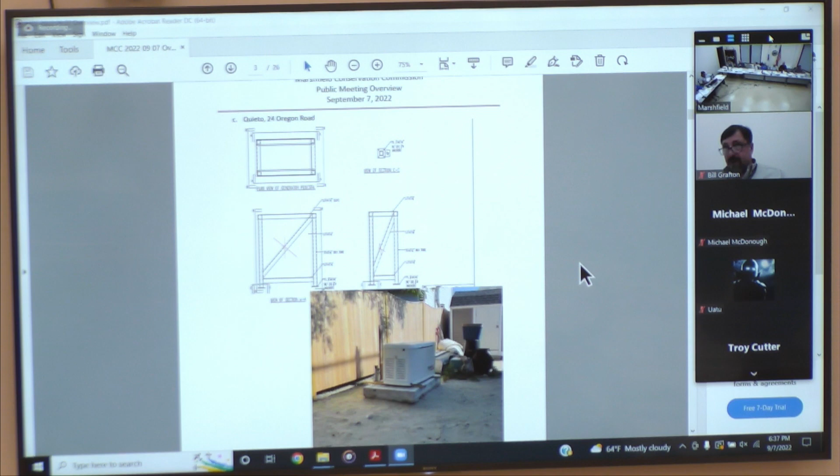As you can see from our visit the other day, the slab has already been delivered. That's the proposed stand design above that picture there. It consists of aluminum. It's not the approved generator, the pre-approved generator stand. But yes, it's made of aluminum and on slab on grade.

We have comments from the building commissioner stating that this generator is required to be elevated at least 4 feet above grade and will require footings or diamond piers. Slabs are not appropriate in an AO zone and will erode and scour during flood conditions, causing structural failure.

This structure still needs a certificate of occupancy, and the building department cannot deal with a generator until there is a certificate of occupancy.

That would come under obtaining all subsequent permits, so that leaves Andrew and the other departments in a position to condition the approval here. So that leaves us able to go ahead and do this as de minimis, and then you stated out in the open that this additional requirement is out there, and it's a natural concurrent moving permit of sorts. So we'll be approving the location, but not the design.

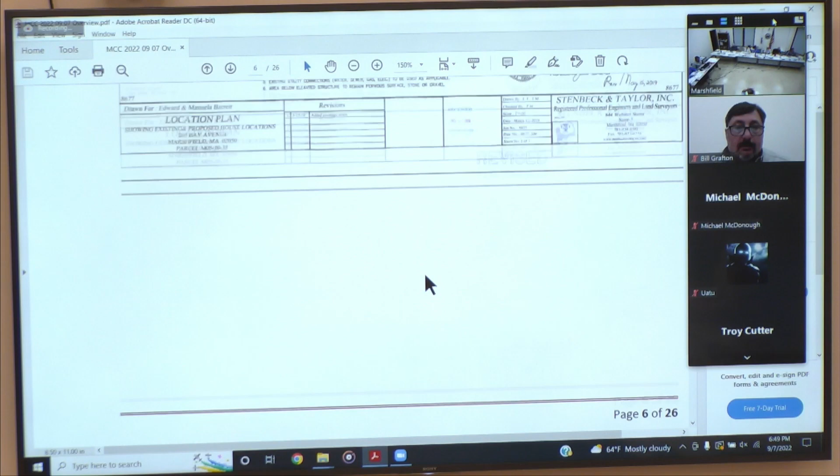We just got it. Is that working for you? Yeah, sure. So which is this? Existing home? Yeah, this is the previous approval. That's the existing home, and that's a sort of different site. That's the one, yeah.

So that's the original approval for this property, that was the existing home, and was proposing a new home on the lot. There was a new owner of the property, Meg Good, who is proposing a different house on the lot, which is why we're here tonight. The house is 6 feet narrower than the house that was originally approved.

It is the same depth, front to back, but narrower by 6 feet. It's also going to be on trimmed wood piles. The finished floor of the structure was required to be at 12 minimum. It's in an AE 11, so it needs to be a foot above the base flood elevation of the finished floor of 12. I suspect it's going to be higher than that, but the minimum requirement is 12.

The reason I say it might be a little higher is because the ground there is 11. So with finished floor at 12, you usually have 2 feet between the finished floor and the top of piles, just for access into the building for utilities and so forth. I suspect it's going to be maybe 3 feet higher than the 12, but the minimum requirement is 12 for that, and that's essentially why we're here. It's a similar house, just a little bit smaller by 274 square feet in the footprint.

Okay. Do you have any comments on that, Bill, or Mike?

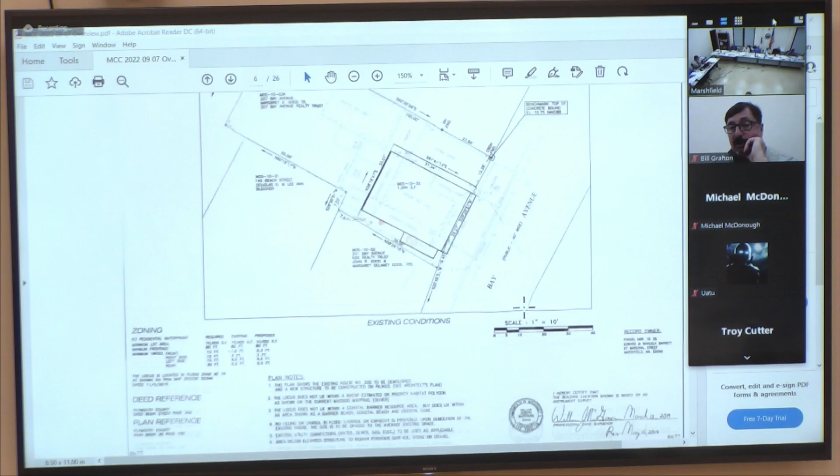Rick did a nice job on this. He took over for Terry, and that's what we need. We need reductions where possible. Barrier Beach, Coastal Dune. Agreed. And a floodplain, and he's in riverfront.

Okay, any commissioner comments? In that case, I move that we vote to approve the reduction of the building footprint square footage as a de minimis activity with special conditions to be captured under the SE 42-2803 as-built submittal for the request for certificate of compliance.

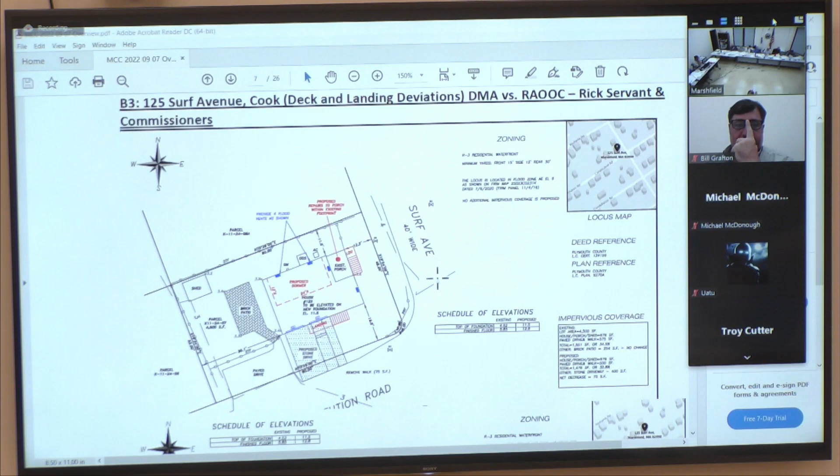This one looks familiar, right Rick? Okay, yes. Item B3, 125 Surf Avenue. We have some deviations with decks and landings. You're going to take this one also, Rick? Oh yeah, okay. We got both here, Rick, just so you know. So, this is 125 Surf Ave.

The existing approval, as the one on the top there shown, is what was approved here by the commission. The house is going to be elevated on a new foundation with those proposed 2 landings to get it down to the ground. The house is quite a bit off the ground.

What's happened is the homeowner changed the decks on the house. We went through zoning, got approved, and worked closely with the building department to get a deck that wraps around 2 sides of the house to connect the driveway with the back of the house. A lot of that was geared towards the elderly mother in the house. It was approved by the zoning board for this wraparound deck, but it never came back before the commission to show the revisions of what was approved. So that's why we're here tonight.

It kind of got missed. The deck went forward with the building permit, but the plan never came back to the commission to show the changes.

So essentially, what you have: we changed from a landing and a long set of stairs that were to service the building, to that 6-foot wraparound deck that wraps around the front of the house and then around the easterly side of the house and connects to that rear porch in the back, just like where it's highlighted there. So we have an increase in square footage with that deck area.

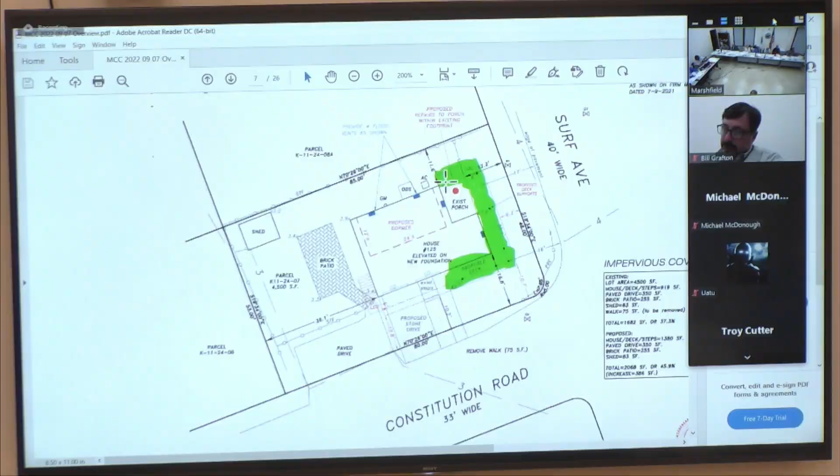My calculations, based on between the existing and the proposed, show we now have an increase of 386 square feet over what was existing and what was previously approved. When you take out the areas of those landings, which were large but certainly not as big as a 6-foot deck that wraps all the way around, in the end we have a 386 square foot increase.

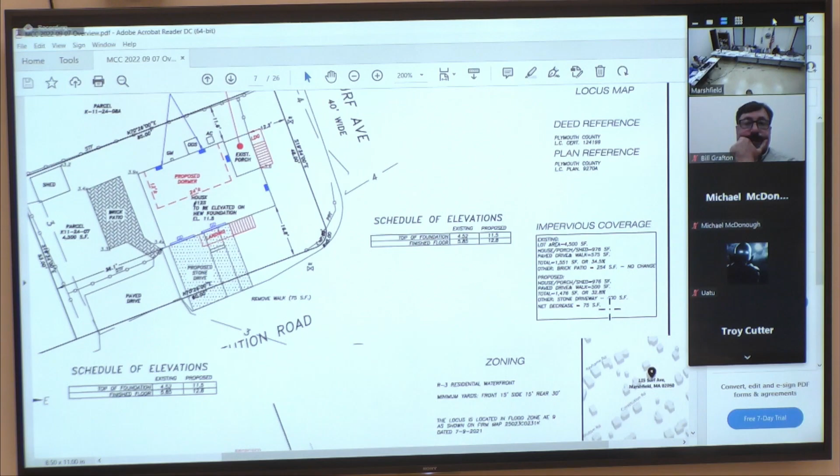It isn't an issue. I count 11 concrete piers out there to support this deck. The deck isn't completed, but it doesn't look to me like there's going to be any more. Right now there are 11 concrete piers in the ground and 1 wooden post connected to the foundation, so 12 supports in total.

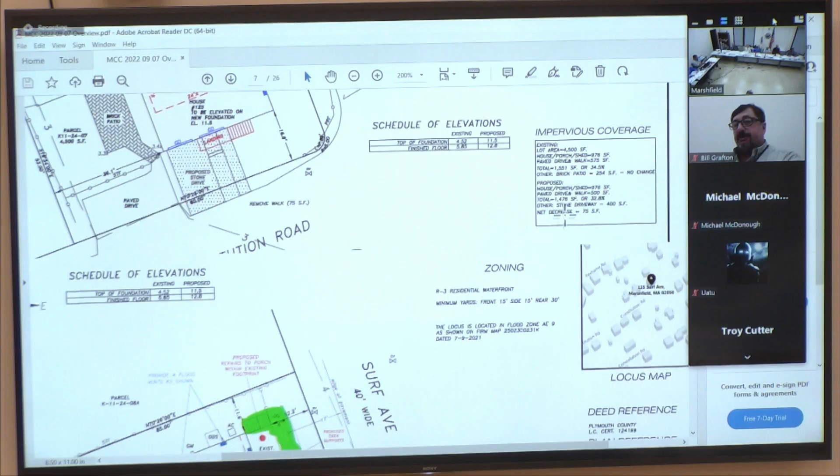That's essentially what happened with this. How does that impact the impervious coverage? How do the piles impact it? I calculated the whole deck surface in this table, so it's shown underneath the deck. I did the whole deck surface as the 386 square feet. It would be considerably less if we used just the footings, but I went with the entire surface of the deck. If you look here, it's a net decrease here of 75, and this 386, so it's really in the 400s.

He's using coverage, which is elevated up, not the post. If we just did the post, he'd only be adding maybe 11 or 12 square feet, about a foot square.

I think the key is, this project's been a runaway project, and we've got to stop that. Rick's here to help do that. I talked to Paul Young in the field. He understands we let him continue with our cease and desist, but if they start putting up hardscape, that's a problem.

Well, they have a patio already on the plan. There's been a long little history here.

So we have a choice between a de minimis or submittal of a request for amended orders of conditions. I think de minimis would send a message that they can't go and do any regular hardscape because it's a runaway project. Does anybody have any strong feelings as to de minimis versus amended?

Okay, how about a de minimis with the updated plan showing - I think it has an AC unit which I didn't see on this - and have those things thrown on the plan. That's on there, unless there's something new, Joe. But I thought I saw it in the one I had, I didn't see it on this one. It is there, in the back, behind, at the end of the green there. Oh, I see it now.

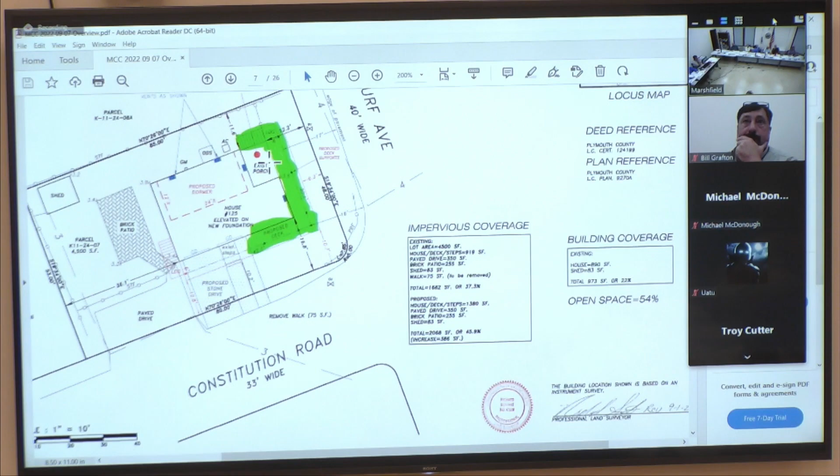In that case, I move that we vote to approve the addition of the elevated deck on concrete footings and new locations of the landings as a de minimis activity, with special conditions to be captured under the as-built for the request of certificate of compliance. May I have a second? Second. All in favor? Aye.

Now tell them to behave, because next time we might amend it. Put a note in the building permit next time, because this is like three strikes you're out. It's gonna happen for sure. Thank you for understanding that, very much. Thank you.

Okay, item B4, 74 Blue Heron Way. This is a de minimis versus a request for amended order of conditions.

I'll speak to that one. Mr. Brett Corchin was here last week for the addition of the pool house on his property, with the associated trenching. He called back after that meeting about removal of a portion of the existing driveway and also the proposed paver patio. He's removing 400 square feet of the driveway to install a 600 square foot patio, a net increase of impervious area of 200 square feet. He's also doing some work on his egress stair on his porch, which is also highlighted.

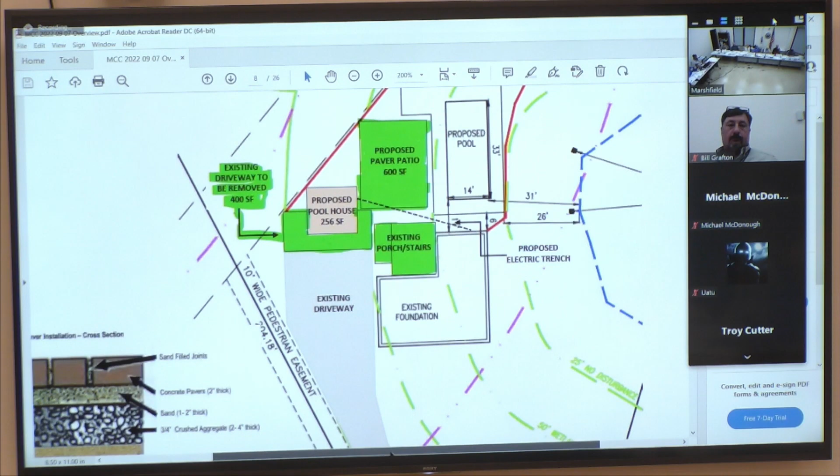There's a cross section here so you can see it's pervious. He understands that was pervious.

We have comments from the building commissioner on this. The project has not received any final gas, electrical, or building permit inspections, and has not had any inspections with the building department since August 6, 2020. No final or life safety inspections have been conducted on this residential swimming pool, so the applicant does need to contact the building department.

Madam Chair, if I remember right, when this came to us earlier we did ask whether or not there was the possibility of this patio, and we were told no. And we reminded him that it needed permitting.

Okay, good, he said three strikes you're out too. Bad day for this all. Good memory.

I spoke to him and so did Mike, and if it goes on again, he'll definitely need a request for amended order of conditions or a new NOI, because you can't keep doing that. But this is proposed, and he may never do it. He just wanted to get it out there as an option. That's why we called it out, or the guy did.

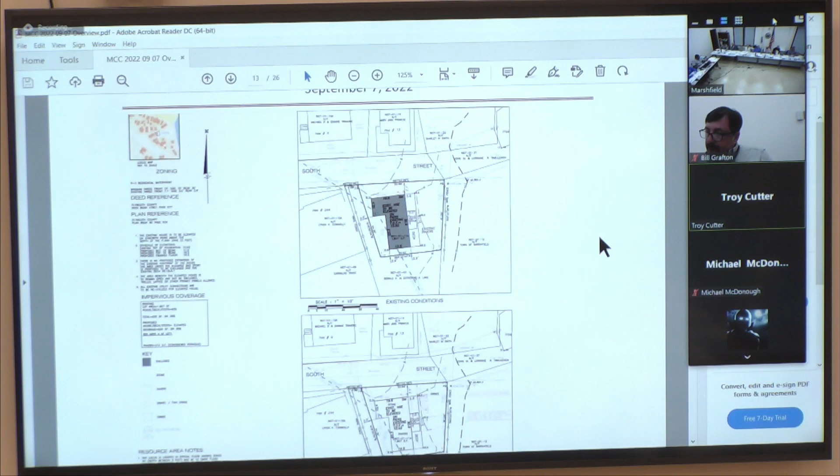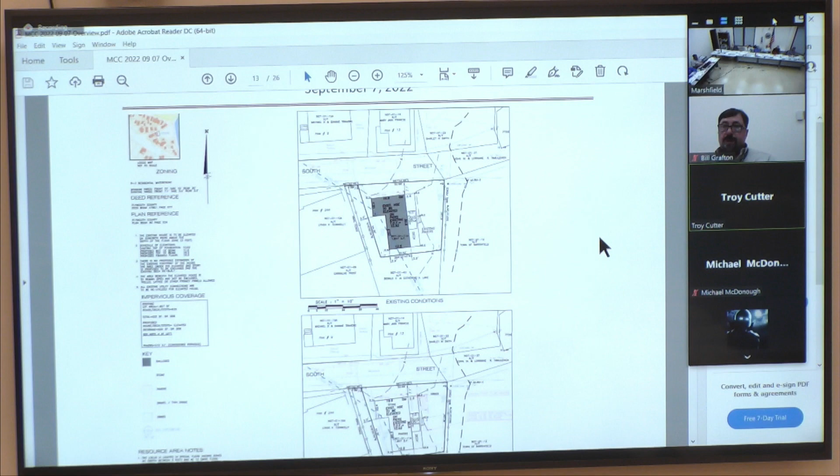Okay, so would you like to explain the situation here? Yeah, sure. Going back a little bit, I've been working with the building commission to rectify a few things after the house was elevated onto the concrete piers. The main thing being we had an enclosure around our utility pipes, our water pipes, that was put up. So the building commissioner recommended we reach out to a structural engineer to make an assessment of the property. We had that done by EPOP, and since then he had us add in two smart vents to the enclosure to be in compliance there. Then I think it was Bill, and I forget your colleague's name—Mike. Mike stopped by and we just talked over some other things. Okay, thank you. Of course.

So, we're in Barrier Beach Coastal Dune in a floodplain. This is the original conditions right here. They got approved back in, say, May of 2021, just to be clear. And these were the proposed conditions.

And so what I'll do is just, I think photos usually help a lot. This was the site visit for... let's see, one more, yeah, thank you, Mike.

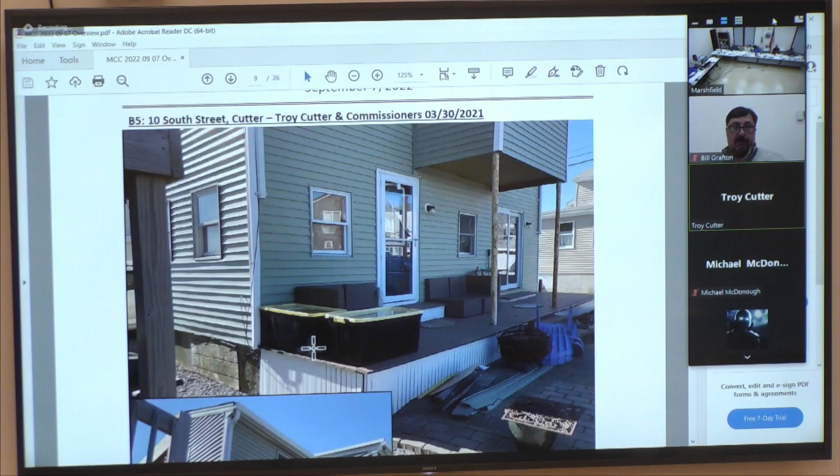These were the site conditions down by the World War II tower, everybody knows it, and this is what it looked like at the time. You got a paved patio here, a paver patio, and these are the conditions from this side of the house, okay? So then they elevated up.

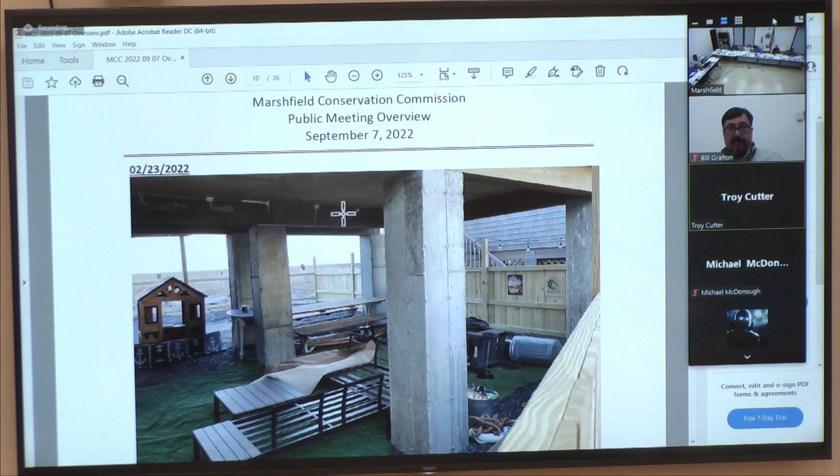There was a lot of discussion about open piles versus these concrete piles, and the concept was for an open environment underneath. This was February 23, 2022. You can't see it, but there's a post right here, and there's a deck coming over. You'll see that momentarily. And there it is.

So this was all pretty consistent with what was on the plan. There was a deck to be up here, I think a porch and so on, and then this raised area right up here. So it's pretty hard pan in here.

And then we got called in, I think it was the 28th of July, I got an email from Andrew Stewart saying that they had put in an enclosure, so we went down to pay him a visit, and you could see within 5-7 months or whatever it was, he got this deck here, which can be removed. He's got shelves in here.

It's a mixed bag of things. You got couches, things that can be moved. We have a shower with, it's pervious here. You got some walls. It's pretty much open slits right here, which allows some water to pass through.

And then the enclosure, these are the vents that the engineer had recommended. And it looks like this from the side. So it's open like this. They tried to have a privacy screening and so on. And he's used shells underneath.

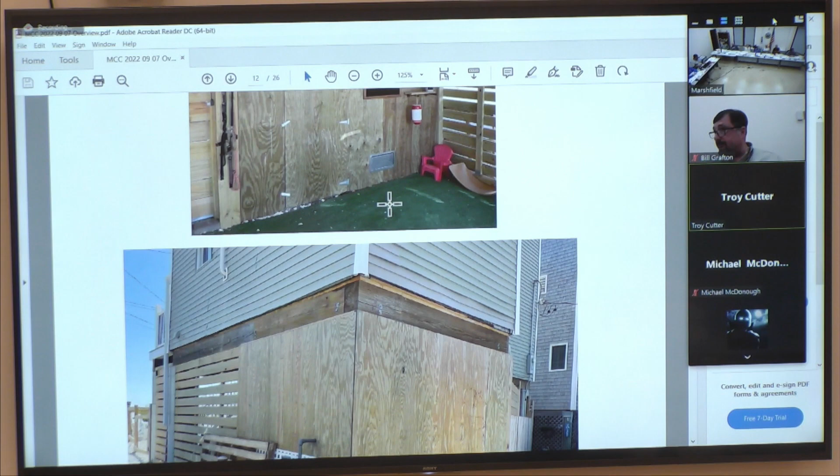He basically showed Mike and I underneath all this, kicked it back about 2 or 3 inches, and it was shells, but it's got a carpet on, etc. So there's a lot going on. This enclosure is probably the number one issue.

The commission doesn't typically say what's going to happen with siding, but you'd prefer this every day of the week. You can't really do that in this environment. The concept was for it to be a functioning enclosure, and the flood vents were required. I don't know where Andrew is on this one.

Let's see. Well, he says, as this location has been delineated as a coastal dune in the order of conditions, building code requires that the area below the structure remain open and free from obstructions. No horizontal slats or enclosures of any kind are permitted below any structures in a delineated coastal dune. Right, and you did find it to be a dune because it's barrier beach coastal dune, and then Rebecca Haney came with Andrew Point and the adjacent partner to go over that more in September of that 2021.

Okay, so basically what he's saying is you can't have that as per 780 CMR. That's where it comes in with the siding, and I can't argue with that. We don't actually have siding. I haven't had anybody, Andrew Point is not able to provide me with anything where conservation gets involved with the siding, but it's a dune.

Andrew is saying that 780 CMR calls it out. You can't have the siding, so I guess that's where you are. He does have the vents now, so I don't know.

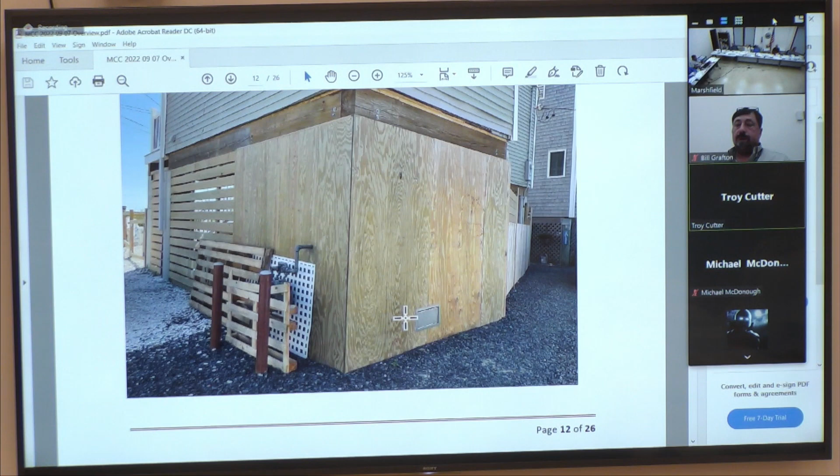So my conversations with the building commissioner and the inspector about the enclosure were, when they first went there, to address it so it could remain, to insulate my pipes. That's why we went through the structural engineer on that piece for the flood vent. So that was upon his recommendation to do that piece.

So the building commissioner is saying that you cannot have any enclosures below the structures, but you put in a flood vent. Did the building commissioner, was he in on that? Yes ma'am, he's the one that suggested and brought up the flood vent, and then I just needed to get it validated by a structural engineer, so VPOP provided a report for that. Is that saying how many inches they needed to be above grade, correct?

Mr. Cutter, was that the April 2022 letter? Is that correct? Yes, I believe so. Okay, I can pull it up if need be. Yeah, we have it, I just don't have it readily available for the commission. So it's the April 7th, 2022 letter. They address a variety of things like hinges and vents and how much square footage, how many there should be, et cetera.

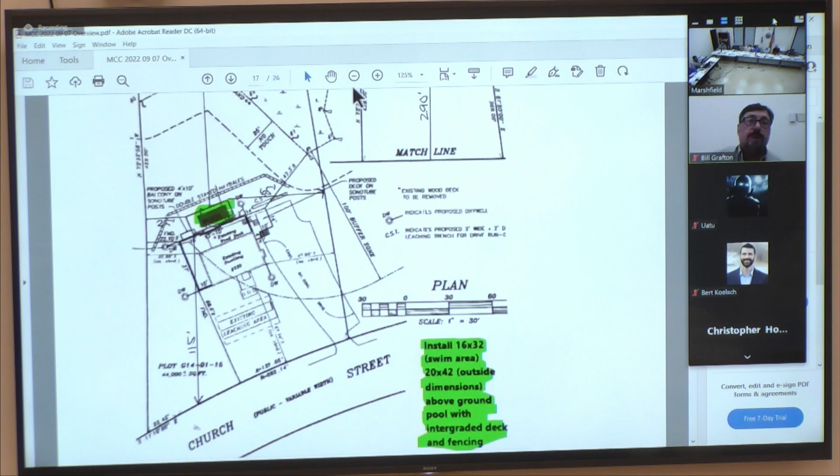Okay, you see the plan there. Would either Bill or Mike take this one? I'll take this one. So I met Mr. Purpura and then Mrs. Purpura and talked about the pool - they're interested in having a pool in the backyard.

And we tried to find out if there's any kind of background, and there is an old permit from 2008 or so. Anyways, long story short, this particular project is separate from that.

It's a pool, it appears to be outside the 50 based upon this plan. We're showing 65 here estimated. It's not surveyed in, and 25 here, so probably could be outside the 50.

This would be classic for an RDA. This is an accessory to the primary house in the buffer zone only, and so it would fit. We know about this wetland line here because of SC

42-2540 for an addition somewhere over in this area, I believe it extended in here. The conditions said they need to have 3 conservation markers here and no activity back in here.

They do have activity. Chair Haniff and I will be talking to Mr. and Mrs. Purpura separately about that. And the pool's above ground, and they have a cantilever deck that they're trying to put around the pool, and they actually want it to be able to step right on their existing deck right here.

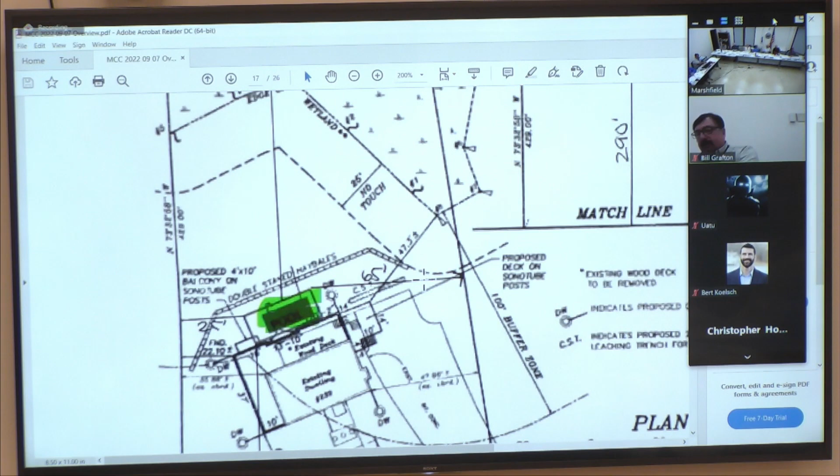So it seems pretty straightforward as a candidate for an RDA. The other activities can be handled under a separate process.

Any commissioner comment? Was there some building commissioner comments? There are building commissioner comments. I don't know if you have been into the building commissioner lately.

The pool and surrounding deck must maintain a minimum 10-foot setback from other structures. He is saying that the building permit was issued in error. I don't know if you have been contacted. That was because, if I'm not mistaken, it was actually approved, but I think it skipped past conservation,

and then I called in, right, Bill? Yeah, I know you voluntarily came to us because the building department didn't direct you to us, and I understand that.

So they came to me as soon as this came up. They actually voluntarily mentioned to the building department that they need a conservation review because they're within jurisdictional boundaries. Otherwise, they could have slipped right past it, and they did the right thing.

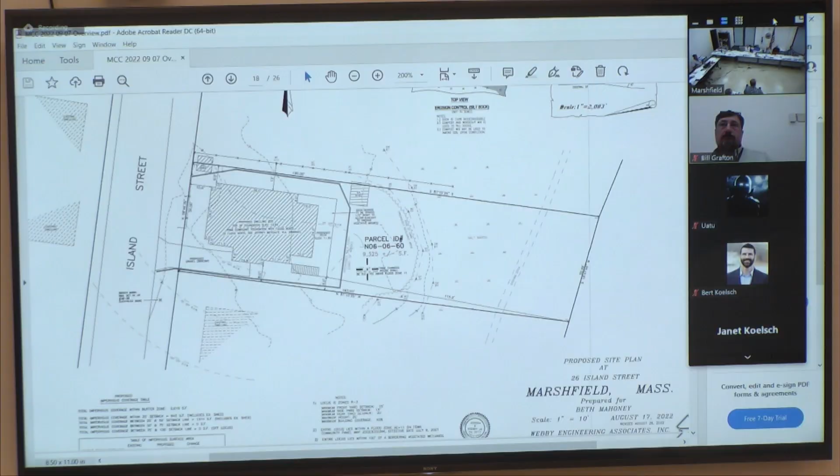What we're looking to do is reconstruct the single-family home and bring it into FEMA compliance, elevating the house above the flood zone and putting in a new FEMA compliant foundation with flood vents. Metcalf can describe those for you if you have questions.

We are partially working within the 25-foot buffer zone. We are already within the 25-foot buffer zone with the house and the deck, so what we've developed is a mitigation plan.

You'll see the existing house is shown in brown, the proposed house, and there's a proposed deck off the rear of the proposed house, shaded in red. So you can see that we're inside the 25-foot buffer, but we're accommodating the area to be rebuilt in generally the same footprint as the existing house, proposed larger with the deck.

We are proposing a 2-to-1 ratio of mitigation so that the total amount of new area within the 25-foot buffer zone is 237 square feet. Some of that is deck, and it's going to be elevated on posts, but we'll still include that in the 237 square feet.

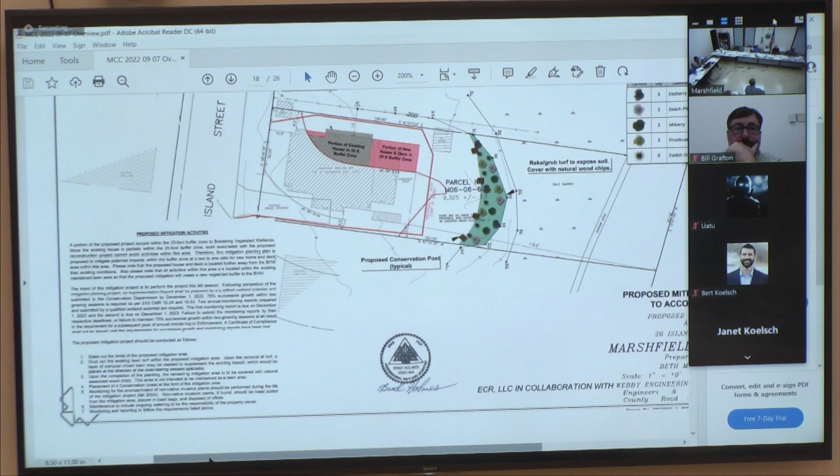I was able to get those conditions including the monitoring and the step-by-step process for implementation of the mitigation work.

So, in general, it's a rebuild, reconstruction within the same footprint, larger. We're in the 25-foot buffer zone, so we know that's a concern, so we're mitigating it 2 to 1, and we're bringing a house that's non-FEMA compliant into FEMA compliance. So, happy to take any questions you have.

Who's commenting, Bill or Mike? Mike can get this. Yeah, I can comment on this one. Okay, yeah, it seems pretty straightforward.

The house is going to be slightly larger. Notably, there was a fence on the back, and the Phragmites were right up to the fence, so having a planting plan here and added mitigation instead of lawn would be beneficial to the site.

It's part of your mitigation plan going closer, you know what I mean? So it wasn't, no, 110%. Yeah, no, it looks like textbook what we want. It wasn't, Brad knew what was going on, obviously. And you also get all of your standard conditions, so when the project ends, first planting season, this goes.

Only question I had in that mitigation area, there's an existing fence. Is that going to be removed? It kind of keeps the Phragmites at bay a little bit. We could remove it if the commission wanted to, or leave it in place. I wasn't proposing to remove it.

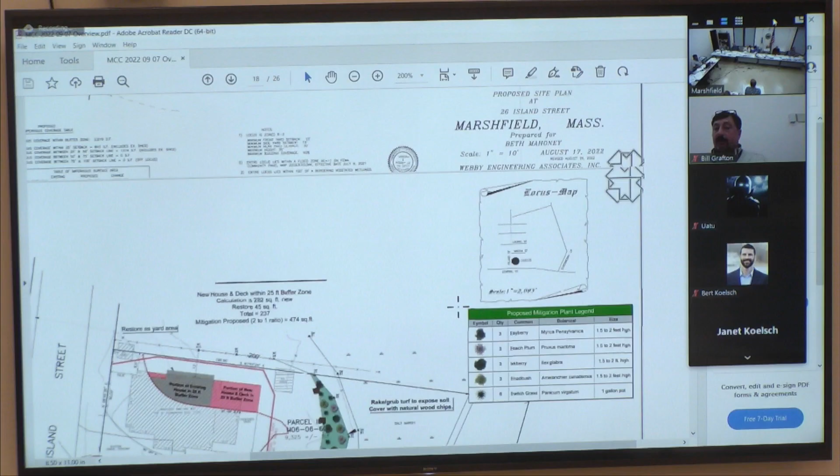So you could get them here, but what normally happens, Bert, on an order of conditions, is general information item 8 will cover the stamp plan, and the secondary item will be the mitigation, which will show these markers. So your markers are in there based upon general information item 8, your secondary plan, so you're covered.

Okay, and in this location, the foundation is satisfactory, correct? It's not barrier beach coastal dunes, so they can do this, I believe.

What did the building inspector, the commissioner, say here? We did actually sit down with Andrew Stewart at the time, at the beginning, and started the floodplain permit. We wanted to get that started, so we actually have that underway. That's another good thing then. I have no further questions.

I'll open it up to the other commissioners. No? I see nothing. I'd like to open it up to the public. Any comments? You're in the room or on Zoom? I hear nothing. I'd like to close the hearing.

And any special conditions, how many months on the growing? It's gonna be 2 years annual monitoring, and 75% successful growing, you'd see within 2 growing seasons.

I'd also recommend that the conservation markers are posted, the 4 of them, 30 to 40 inches out of the ground, facing obviously the house. Obviously follow all building codes and FEMA FIRM regulations.

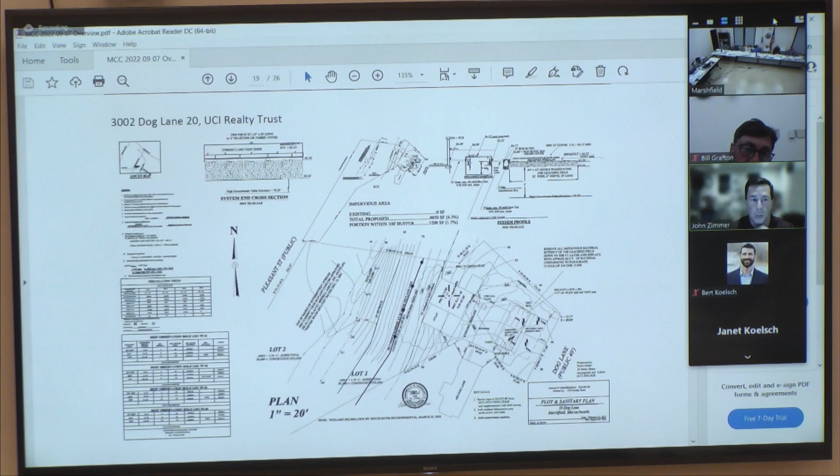A portion of the work is located within the 100-foot buffer to the BVW. There's no work proposed within the 50-foot buffer, and the structure is located outside of the 75-foot no-disturb buffer. Of the project, there's about 3,500 square feet total proposed within the buffer zone.

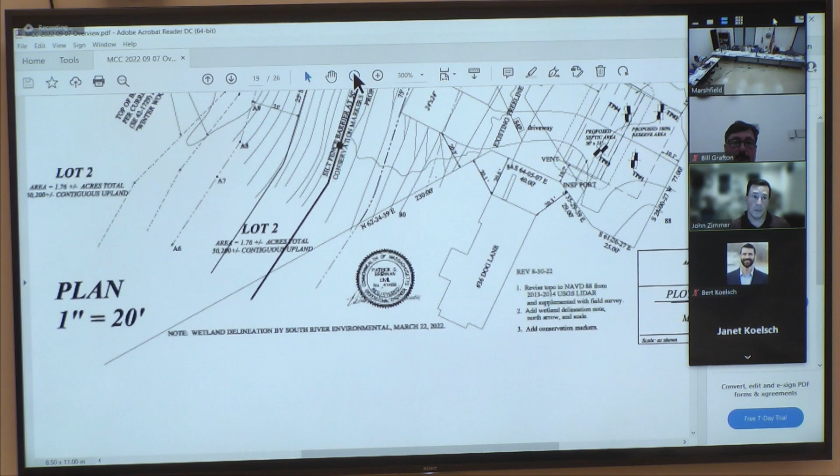With respect to impervious area, there's a total of about 6.3% within the property, and new impervious of only about 1.7% total, so a little under 1,300 square feet.

We worked with the applicant to install conservation markers along the limit of 50 across the property, but in actuality, a much larger percentage of the property is going to be preserved in its natural state based on the configuration of the lot.

There's really not much other buildable area within the property. So what's going to be located within the 75 to 100 is the portion of the garage and the residence. The driveway and the septic system are all located outside of areas subject to the Commission's jurisdiction.

We will install erosion controls at the limits of work and stabilize all exposed areas as soon as the final grading is done. That's about it in a nutshell. Happy to answer any questions the Commission may have. Right now, the property is undeveloped.

John, the correct date is March 22, 2022, down in here. Thank you, sir, by Pat Brennan's stamp. Thank you, John. Bill, your comments?

So the first plan that came in, there were severe changes or discrepancies between a number of the contours that were here and what we saw on the town's professionally prepared contours. So I asked Dana Jr. to look at that.

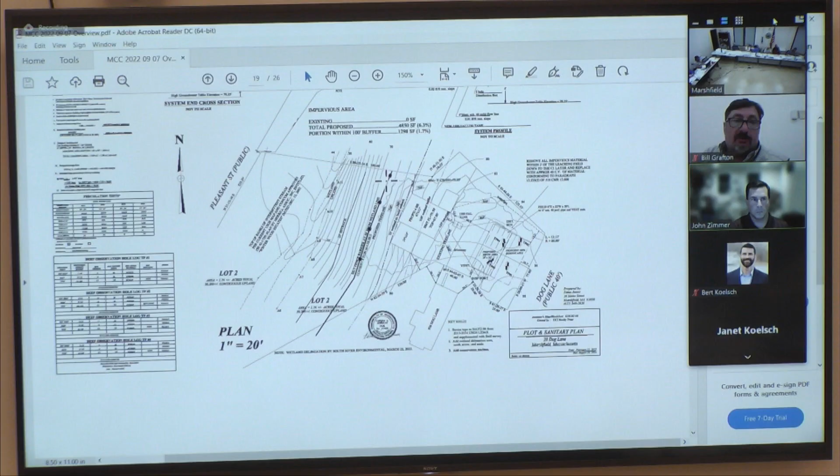So when you say bank, though, what do you mean? So the 50 there—okay, if you follow the contours, let's see if I can find the number. It appears to be the 70 right here. It kind of runs right through here. It's the last sharp line.

It might be, it's knowing where that is, because this is the fragility zone right here that will have the impact on all of this down here. Within like 5 feet of this is the area that is the most vulnerable right here. So having this known really well, it might actually be more like here, which is problematic.

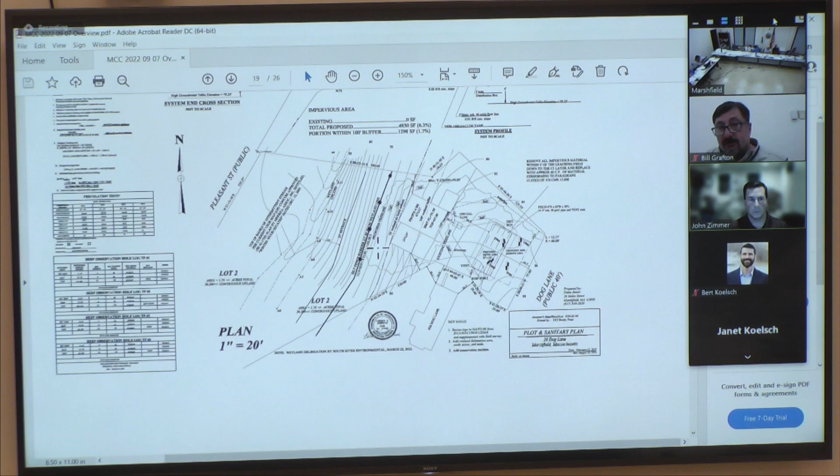If it's where it is, with conditioning, you might be okay, if there's no retaining walls that ever go in there. If these numbers are wrong and massive filling suddenly comes out of nowhere, they might need a retaining wall like the neighbor has over here, which is a small one, but this might be larger. And so that's the worry, is they step in, they get approved, and then, oh my, I have to bring in 80 tons or something.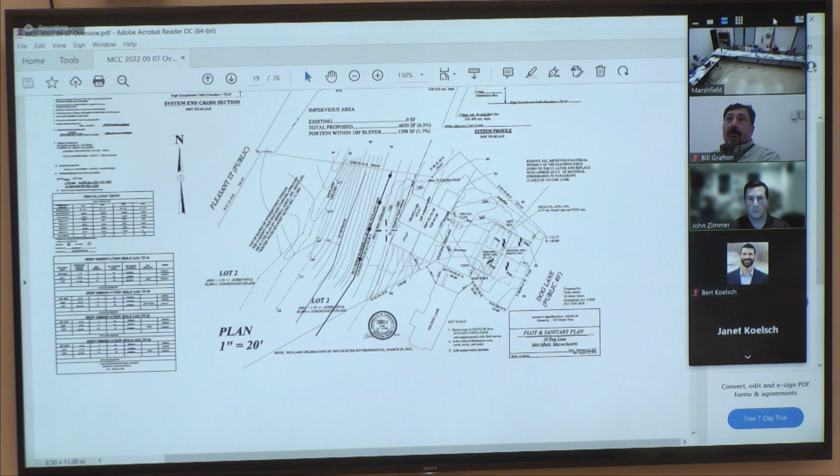And they need a request for amended order of conditions, or they want a de minimis, for a lot of dirt that's going to be filled in. So they want to prevent that.

Nothing further from other commissioners. At this point, I'd like to open it up. Is there anybody that'd like to? I see Mr. Finn.

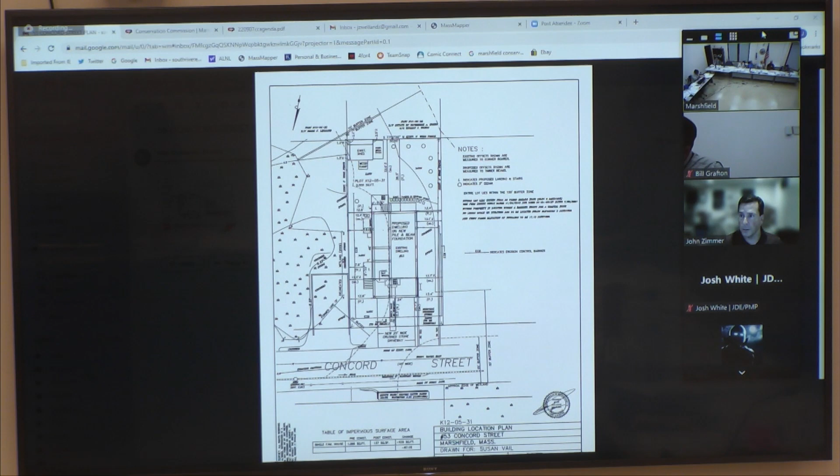So it's going to be decreasing the amount of impervious surface within the lot by about 87%, an overall net benefit to protection of the resource areas. But like we said, it is in close proximity to salt marsh and also within the coastal storm flowage. So that's pretty much it in a nutshell, I'm happy to answer any questions you may have.

There is an existing fence around the back with a shed that is shown on the plan. There's no plans to modify that at all. Michael, do you have any comments, Michael or Bill?

Yeah, just something to note. There's two buffer zones applicable here: one next door with 49 Concord Street, permitted under DEP number SE 42-1716 circa 2002-2006, and also from across the street. So, yes, but it seems pretty straightforward.

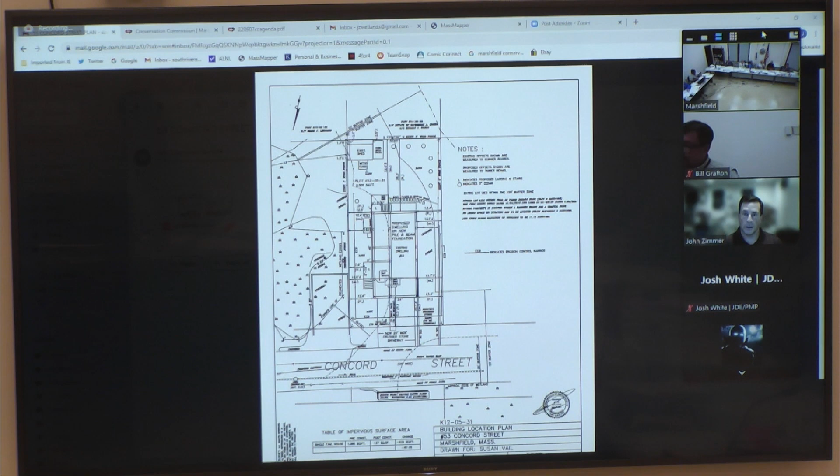Yes, it does. One thing I forgot to mention is that all the utilities will be above base flood elevation, and there'll be no living space below the base flood elevation, so it complies with building code and the commission's bylaw.

Commissioner comments, questions? I see they do have the floodplain permit. They've been through ZBA, so that's all good too. So I don't have any comments. This is an improvement myself.

Anybody from the public on Zoom or in the room? Concerns? Questions? All right, well, seeing none, I will make a motion to close and issue a standard order of conditions with some special conditions that Michael will address.

In the D2 section, during construction of the proposed work, follow building codes and FEMA FIRM regulations, and post-construction under D3, an elevation certificate shall be provided to the Conservation Department. Did you say you'll also specify no obstructions or enclosures below? Did you mention that? Yeah, we can throw that in there.

Before you do that, we just don't want any hardscape down there. Typically what we have in the standard conditions, let me read that. That's right here - any additional ground surfacing, correct, under D2? Read that into the record, and that should take care of it, because we don't want to get involved in the enclosure part of it. It's just the surface that's the commission's concern.

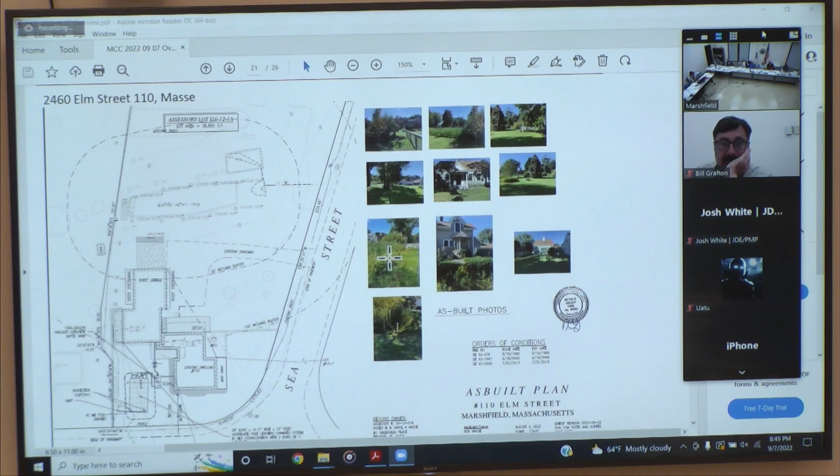Okay, SE 42-2460, Masse, 110 Elm Street. Okay, we have some ongoing conditions here. We're just pulling up a screen for you. So they added in the 10 conservation markers. This will join up nicely with 117 Elm over here. They've got, here's a picture of one of them right here, so they're just crossed, just to give you an idea. So they posted them out there, and they'll be on this permanent document.

So the concept here was to get that level of protection, so that as the property changes hands, the cattails in the wetland don't get wiped out. So those are 10 permanent conservation markers on the final approved as-built plan dated September 2, 2022, by Grady Consulting, signed and stamped by Kevin Grady, RPE, remaining posted in the field 34 inches above the ground surface in perpetuity on 4x4 rot-resistant pressure treated cedar or equivalent posts, just to leave it to remain in perpetuity.

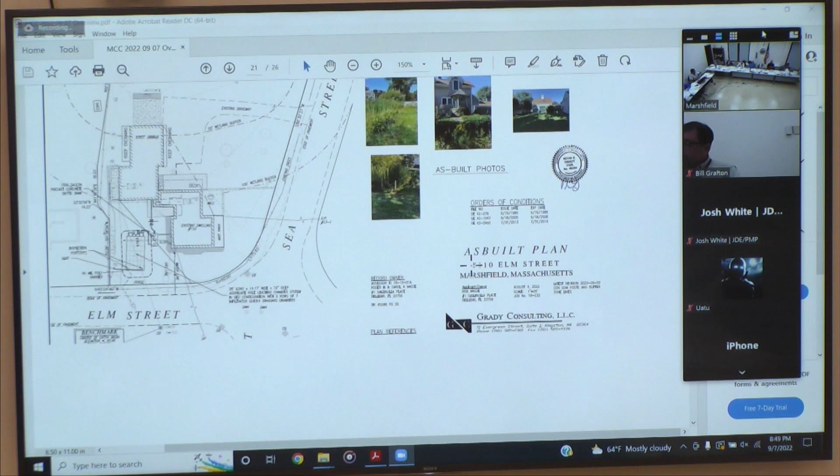Thank you. I move that we vote to issue a certificate of compliance with ongoing conditions as discussed. May I have a second? Second. All in favor? Aye.

SE 42-2653, 55 Central Street. Once again, we have ongoing conditions, which again are 3 permanent conservation markers.

Depicted on the final approved as-built building location plan. Do we have a date on that, Bill? It's August 30th, this year - August 30th, 2022.

I move that we vote to issue a certificate of compliance with ongoing conditions as discussed. May I have a second? Second. All in favor? Aye.

422773, 1185 Ferry Street. Escobar. Okay, we need - that's the table. I move that we vote to table this to allow more time for the conservation administrator and agent to develop a resolution.

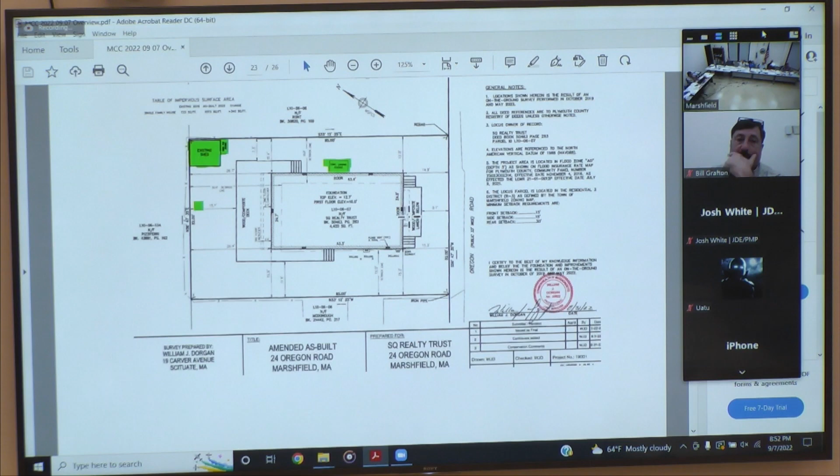Unless anyone objects, I would move that we vote to issue a certificate of compliance. May I have a second? Second. All in favor? Aye.

422959, 92 Quincy Avenue. Once again, we have ongoing conditions regarding 6 permanent conservation markers. I move that we vote to issue a certificate of compliance with ongoing conditions as discussed. May I have a second? Second. All in favor? Aye.

Okay, and all these reference the as-built, which you've read, that are here. Take care. Okay, and then.

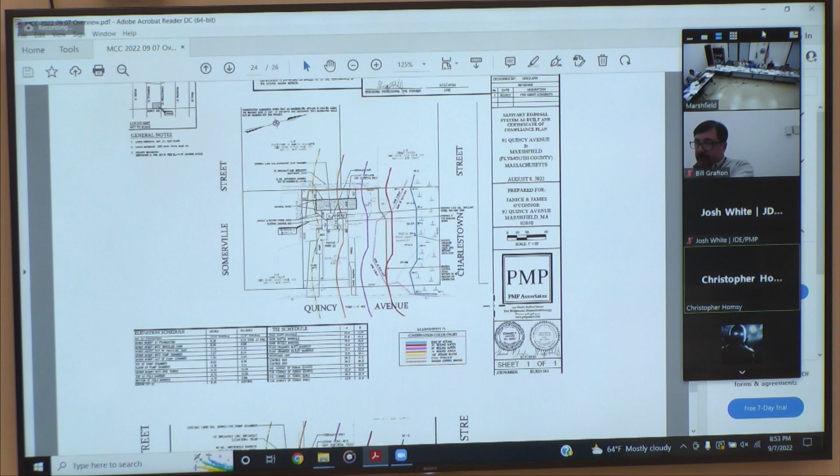Item B9, enforcement orders, 987 Ocean Street. Is Mr. Homsy here, or Mr. Rigo? Chris is here. Hi, Chris. Hey, how are you? Thanks for joining. Hi, good for having me. Hello, everybody.

Plants that are on this plan here that are on her property. There are 3 right here in the buffer zone, and there's 1 down here on this property. So we shared that, and she picked the tree she wanted, sent an email. Bert's been on the email. He's the.

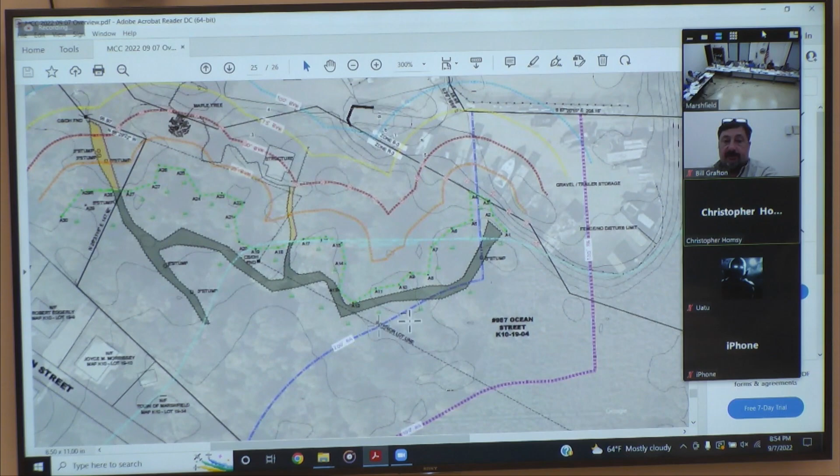Hearing officer on this, and everything's been resolved. And then Mr. Homsy and I have been coordinating with the engineer, Mr. Rigo, trying to get it finalized for the symbols on the planting table and on this plan right here, so that they're sprinkled into the right locations, because a lot of these neighbors are bummed out about the cutting that went on. And it's a pretty simple process, but it's been difficult for Mr. Homsy and I to get this accomplished, even though we've been working in tandem.

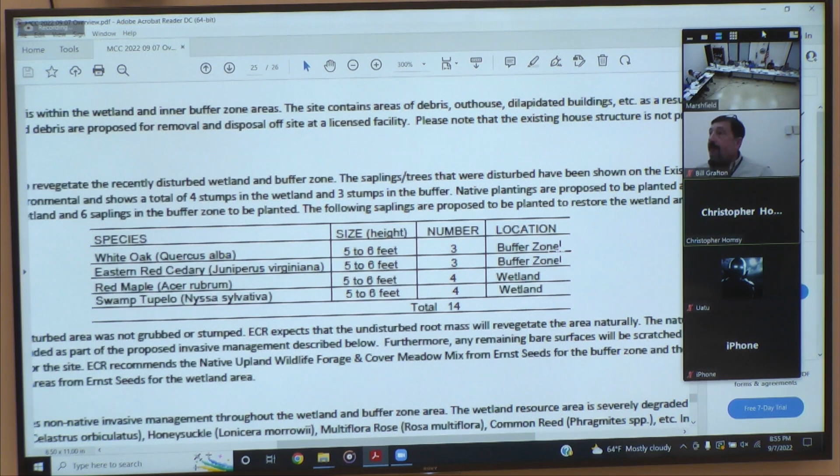So I just wanted to let that be out there, that the homeowner or the property owner is working hard to get this done. We're at the final revision. It's just a matter of getting it in front of us, and I don't know what else to do at this stage. He's tried, I've tried, and I just think the commission should let them know what they think and figure out a solution to this, because we have a rare injury that Mr. Rigo's going through. So we've had a leg injury.

But we have a plan that is satisfactory, and we know which plants Karen Donahue wants. She wants 4 of the plants back, and Mr. Homsy - I didn't have any problems. But we don't have the qualified wetland scientist, so he doesn't want to step over, and his other consultant to go to Mr. Holmes. But if he could, and he heard from the commission, he might just be able to get a simple Brad Holmes letter, for example, and something that augmented this and sprinkled on the symbols that you want, and it's over.

That's fine with me, I don't think anyone objects. I move that we vote to approve the revised restoration plan, dated... well, we don't have that revised restoration plan, so I had a conversation with Mr. Homsy so he would know. We don't have Rev 5, we don't know when we're getting it. He's ready to plant, ready to do what he's got to do. His sub-consultant could do the work, as we saw earlier tonight. He created a planting plan, put conservation markers on it, and there was a plan that was approved. So Plan 4 could be the approved plan, augmented by Brad Holmes, because we don't know why this didn't happen. Mr. Homsy has tried, and I've tried to help out.

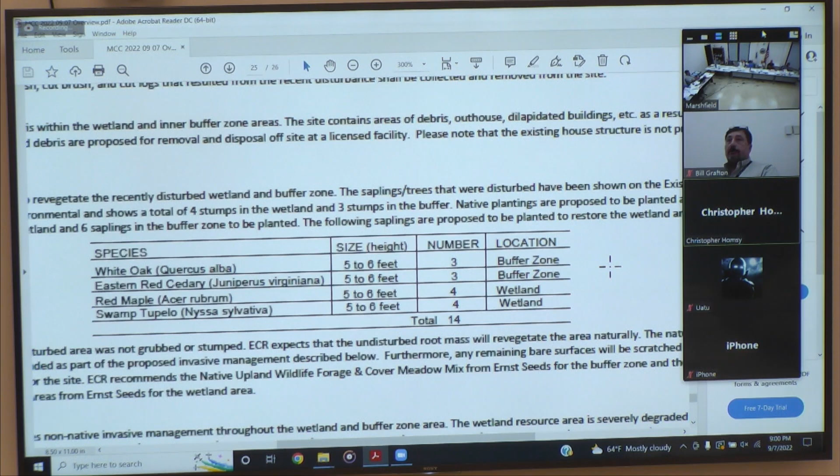I think that works for all of us. What do you think, Mr. Homsy? Yes, I agree with everything you said. If you can get an approval of Revision 5 pending an augmentation, with the markers in place for the plants, the location of the vents, and the types of plants to be located, that would be very much appreciated. As Bill said, we've been trying to work with Bob as much as possible, given his situation, to get this resolved and submitted to the board as soon as possible. He went through a horrific injury, so we're trying to be sensitive, but we're trying to get things done.

Just to be clear, the commission would vote to ratify Plan 4 with a memo from a qualified wetland scientist like Brad Holmes or somebody equivalent. The only reason I mentioned Brad is because he's already done the work and he's just as good as himself, or somebody else who's a qualified wetland scientist. Does that seem like something you could work with, Mr. Homsy, so you've got something in place?

That was for me, yes. Okay, well then maybe he's back on the 21st with a memo, and then you've got Plan 4 with the memo, and it's done. We won't go for the 5th one — everything stamped and sealed under Bob Rigo — we'll just have 4 done and a memo. So I move that we vote to continue this to September 21st, 2022, pending receipt of a memo from a qualified wetland scientist depicting the symbols. Do we need conservation markers noted on there? He's already got those on — just the symbols of the plantings.

May I have a second? Second. All in favor? Aye. Okay, Mr. Homsy, there you go. Thank you, Mr. Homsy, thank you.